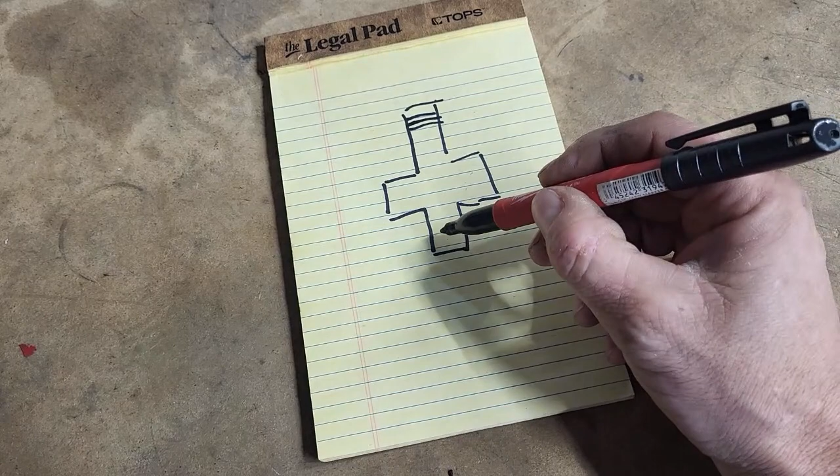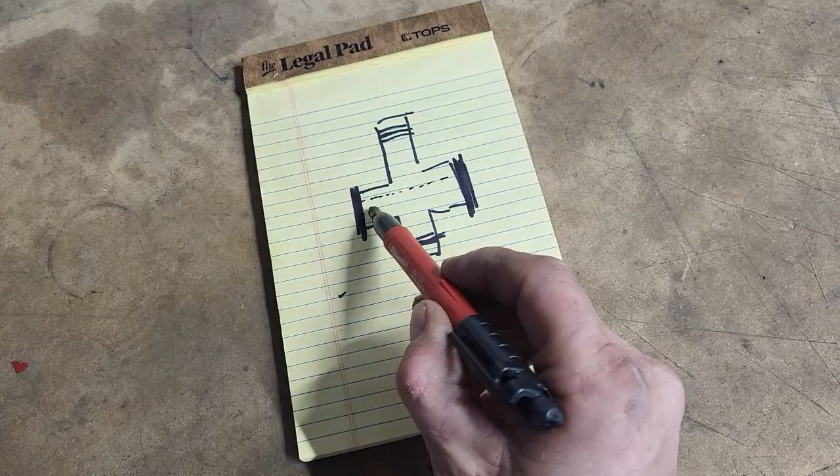Okay, I'm going to draw a little diagram here, all rude and crude, but we're going to do a little picture of what the link looks like to start with. So this is roughly what that link looks like from the top side. You got the chassis pivot up here, there's a bolt running through that. Then what would have been the shock clevis goes through here, and there's a sleeve and a bolt running through that. And then your lowering links are on both sides of this boss here and here. So there's your links, and then there's a bolt, there's a big sleeve in here, big heavy duty steel sleeve, and a bolt running through the center of it, right?

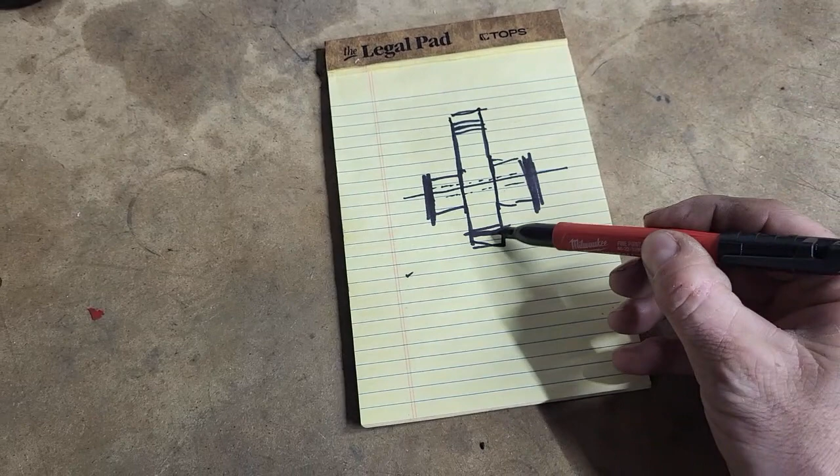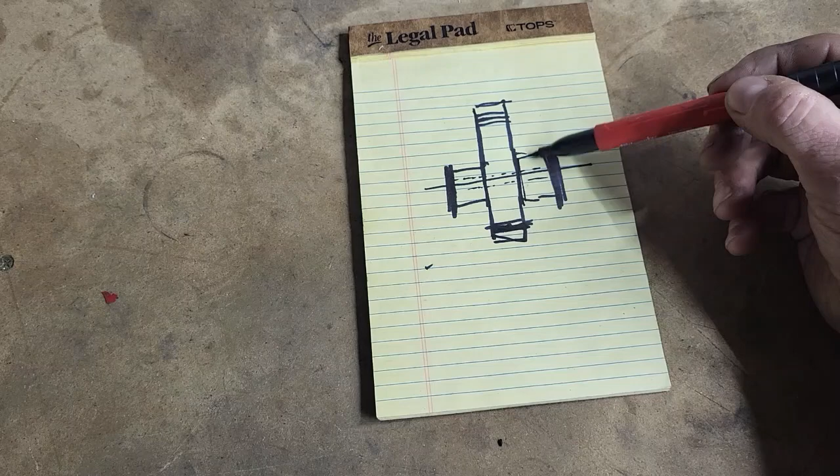Well, when you want to put the shock onto the same location as the links, what I did is mill these ears off. So basically my link is now just one straight slab of metal. This hole back here where the shock was, right now is empty. There's nothing in there. I could still utilize that location if I wanted to. I could move both these back, or I got a combination of things I can use here. But where I landed is what's been the best setup so far. So basically, once you cut these ears off, these big hunks of metal here on each side go away.

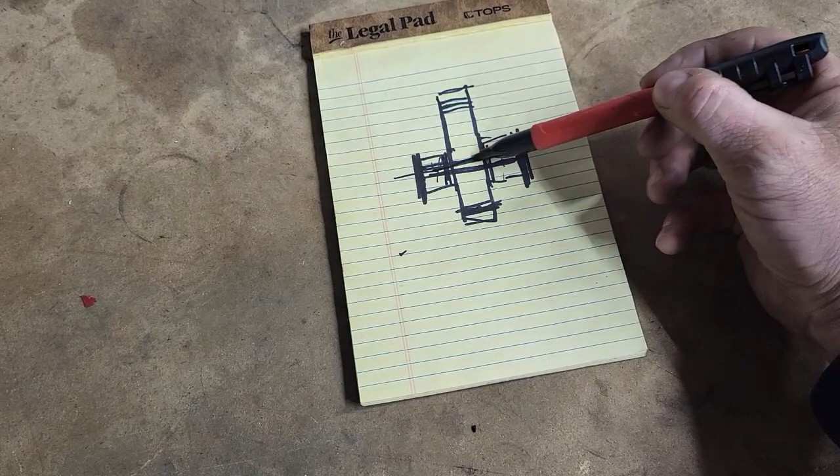Now, you need to still space out your lowering links, got to be spaced out yet. So you're going to still use that steel sleeve that's in there, it's a heavy duty steel sleeve, you ain't going to bend it. And then the shock clevis is going to go on the outside of the link, but you need to bore out the clevis for that spacer to fit through, so everything ends up on the same plane. There's nothing tightening down the shock clevis to pinch against the center link piece itself, so the shock floats on that pin.

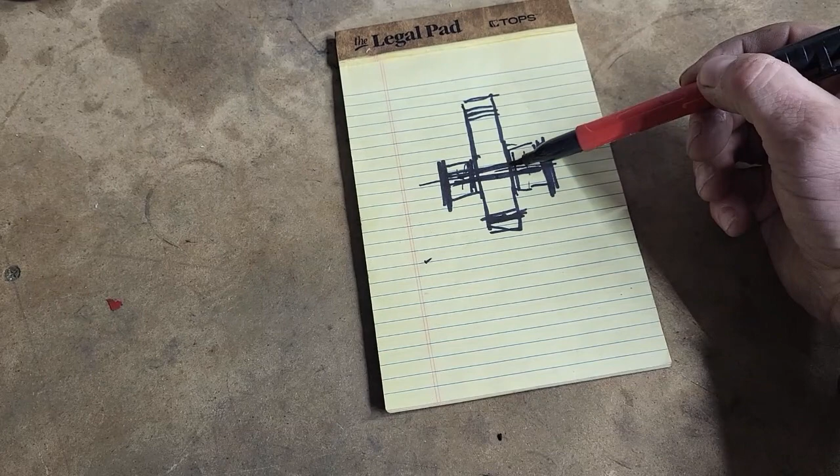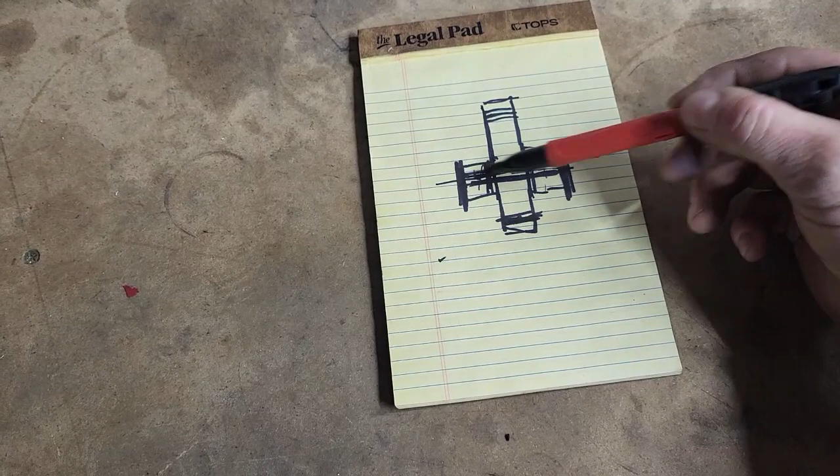Then your links will tighten down against that sleeve, just like they would if that material was still there. There's no bearings in this, it's an Atom style link. You just use some real good grease is all I can tell you. But I'll show you under the bike now how it actually all goes together. That's what you're going to start with, is the link with the ears sticking out where the links go. You've got to cut it off, move the shock forward, drill the clevis out, and put everything on the same point. So let's go look under the bike so you get a better idea of what I'm talking about.

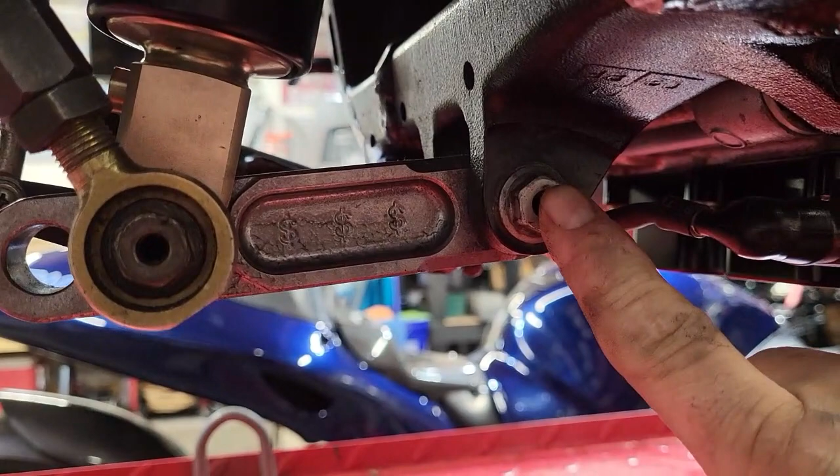So here's what I got going on. Like I said, here's the chassis pivot. This bolt goes through the link. There's a steel sleeve in there, so it's still somewhat of a bushing. This is maintenance type stuff. This was a street bike. The factory links come with bearings and stuff in those, but I'm not putting 30,000 miles on this thing on the street. This bike gets enough regular maintenance. Grease, steel bushings, we're going to be fine.

So there, steel bushing, bolt, and then if you sneak around the end here, focus, you see what I'm talking about. That's a pretty heavy duty steel sleeve there that's running through a bore that's the same size as this here. This is where the shock would have been, but the clevis for the shock has now been opened up to just barely fit that sleeve through, and then your links bolt to the outside of that sleeve. Also, this is a 1K with a flat link. You need to use Busa lowering links. They're shorter - normally you'd have a lot longer of a link on here, but that actually works out pretty slick.

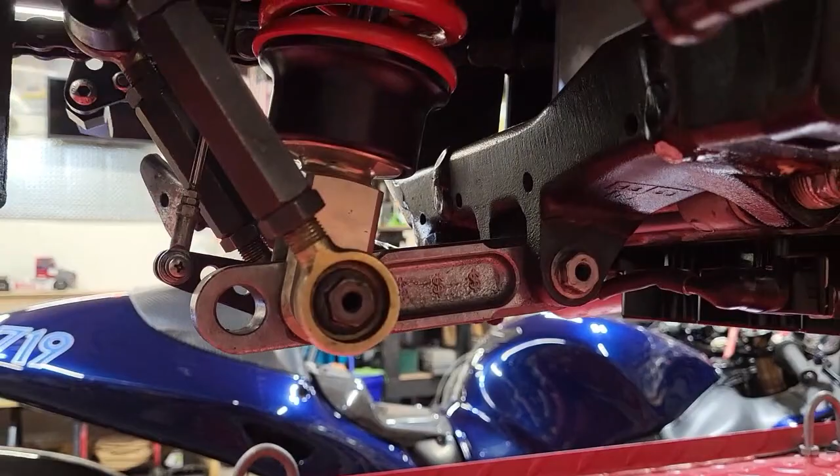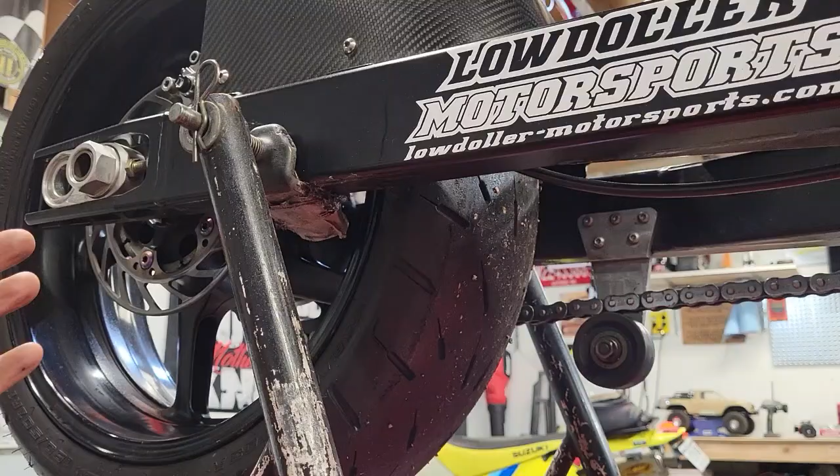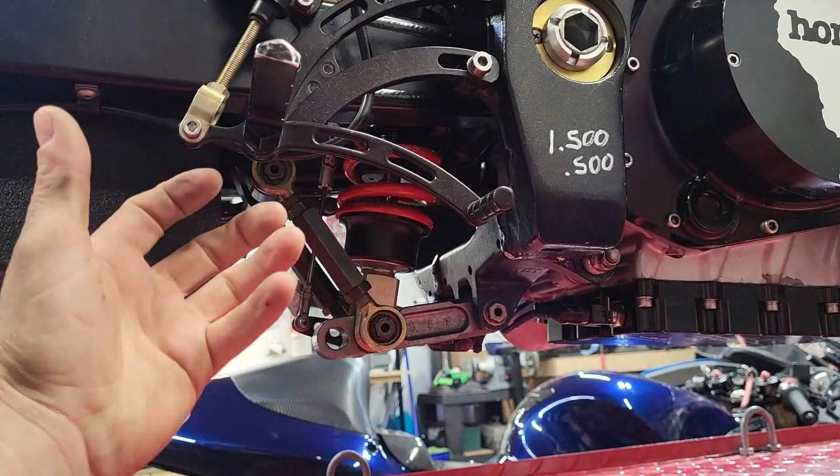But that's all there is to it, guys. Just that simple change totally changed the overall geometry of how this shock was acting, which was just way too stiff. And again, my bike is almost 70 inches long, like 69 and a quarter or something. It's not like it's a short bike that doesn't have any kind of arm on it to make the shock work. Even with that arm, the shock was just too stiff to actually make the bike do anything. So just that change is what got me in the ballpark to - you see in the videos - the bike just works and how well it plants the tire, spreads the tire out real good. It's putting the load down through the tire. And like I said, it rarely spins the tire unless I'm forcing it to, or the track is just too much to overcome. But that's it.

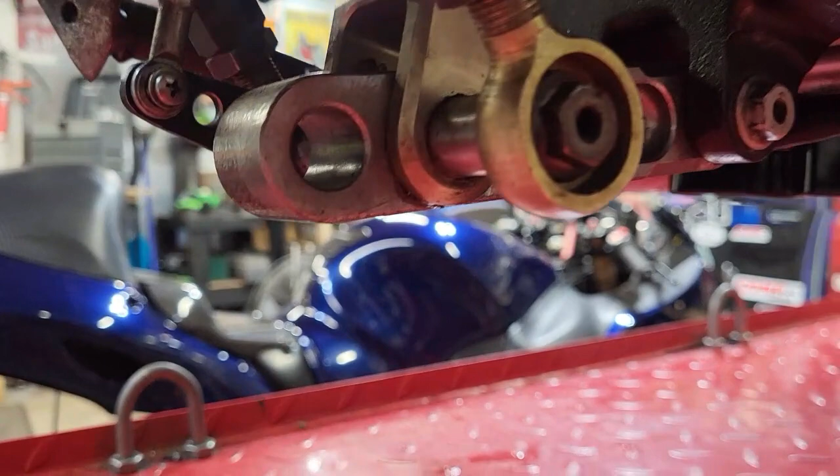I'll get in here real close again for you so you can see. The bracket on the other side is just a shock sensor tab. Don't get confused.

It's just that easy. So a little creativity and some elbow grease, you can make a part that would have cost you 400 and some bucks to replace. You can make it work for free monies.

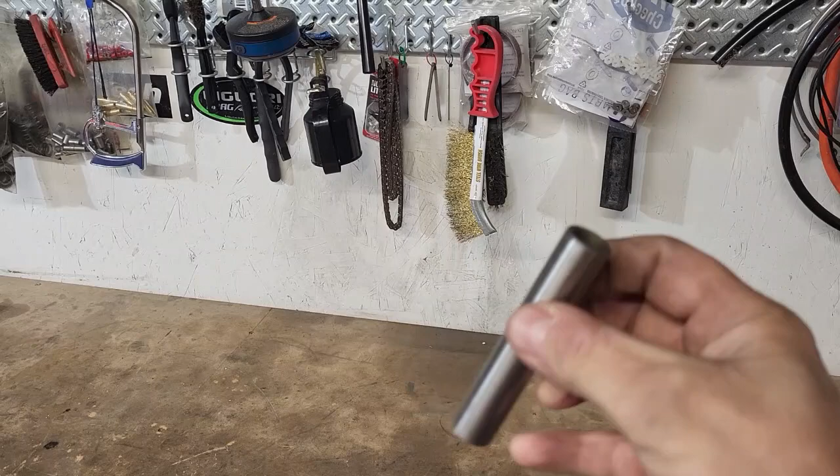And I'll show you real quick, this is what I'm talking about with those steel spacers. You've probably seen them if you had suspension apart. This is not the one for my bike, it's just similar to what I'm talking about. That's what's in there between the links.

So that's that. I told you in one of the posts I put up that I would just try to do a quick video on what it was. Like I said, a bunch of people had questioned me about what I did to that link, so I'm thinking a bunch of you have that link. It's a pretty popular part, pretty popular company.

It's just that simple, man. Go out and cut some stuff, try some things. Worst case scenario is you go slower, and then you know to go the other way with whatever change you're making. So I just want to see people go out and try stuff, do things. Don't be afraid to cut stuff and start over, it's the name of the game. So thanks for watching. We'll see what else we can come up with for quick little kind of tech tips if you guys dig that stuff. So see you later.